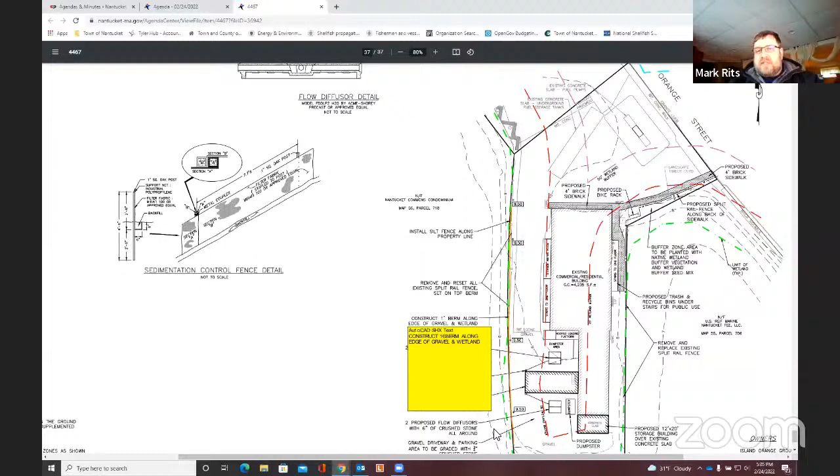Let's start with the easiest. The first thing I'd like to discuss: we're proposing to install a pervious brick walkway that will start at Orange Street, come in along the south, eastern portion of the property, down to the entrance of the store, and will also extend down the east side of the building to allow access to a set of stairs going to the second floor.

Currently, the portion of the walkway going from Orange Street to the intersection, where it goes in front of the building and down the side, is partially paved parking lot and partially trampled, altered dirt. Right along the property boundary there's a split rail fence. We're proposing to maintain the split rail fence and put in a pervious brick walkway.

The portion of the walkway in front of the store is currently concrete pad and/or asphalt. The portion going down along the eastern side of the building is partially asphalt, with the rest being grass and stepping stone paths.

So it'll be a little bit of a change, but it's really designed to contain pedestrian traffic and allow for safe access from Orange Street to the retail store. Currently, people are walking through a portion of the parking lot that has concrete stops and assorted other things. It's really a safety improvement for pedestrian access.

The second item we'd like to do is on the southern end of the building, where there's an existing concrete pad, partially fenced in, used as a storage area for recycled materials. Because of the open nature of that area and high winds, despite best efforts to keep things on site, occasionally stored recyclables get blown around into the wetland and parking area.

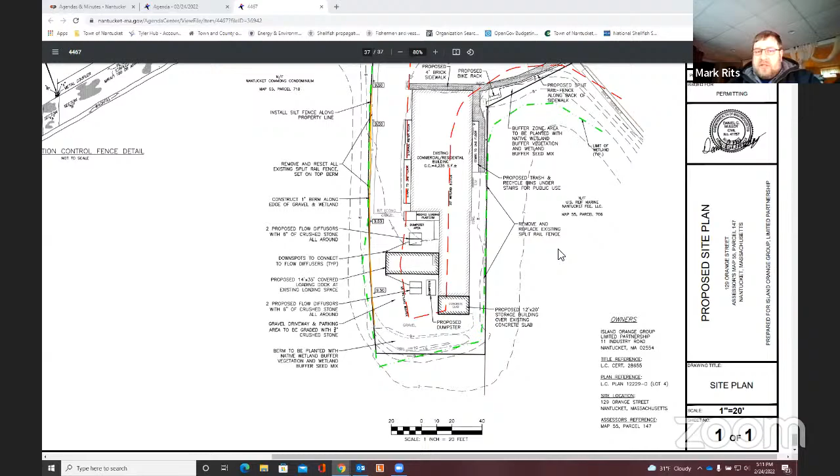With that, I'll be happy to answer questions on any of the components.

Thank you, Mark. Are there any questions or comments from commissioners?

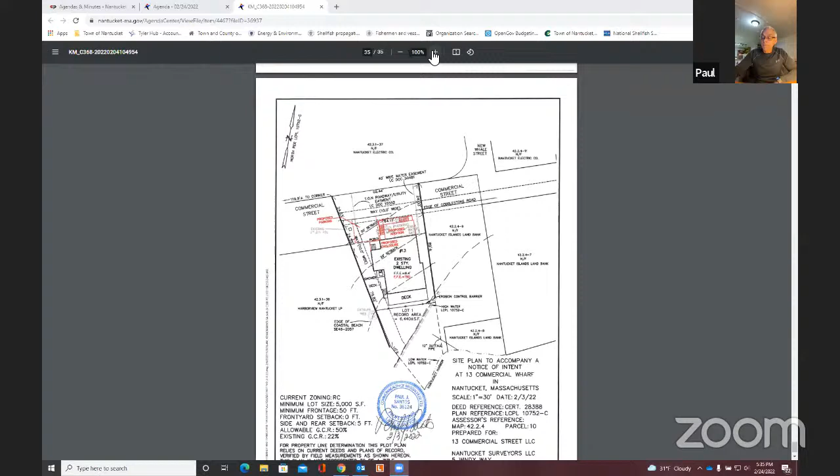This is a residentially zoned property located on the south side of Commercial Wharf. It's adjacent to New Whale Street, and it's across the street from the Nantucket Electric Company property. It is bordered by Commercial Street to the north and the Nantucket Harbor to the south. The property contains a single-family residential structure that has been there for some time.

In 2008, a prior owner sought approval for a renovation and expansion of the existing dwelling, and that's how the dwelling currently sits today. That renovation involved expanding the existing dwelling, replacing or eliminating an old wood bulkhead that existed on the property, and elevating the site to be flood zone compliant with the regulations in effect at that time by placing the property completely on a wood pier foundation. So it's an elevated structure, completely elevated on wood piers.

The site itself abuts Nantucket Harbor. In fact, the property line is the mean high water of the harbor. There is also a coastal beach associated with the harbor that runs underneath a portion of the existing structure. You'll notice the line of the harbor is shown on the plan, then there are 3 dashed lines: the edge of the coastal beach, the 25-foot setback, and the 50-foot setback. The structure itself is located on the coastal beach, within the 25-foot setback, and portions of it are also located within the 50-foot setback.

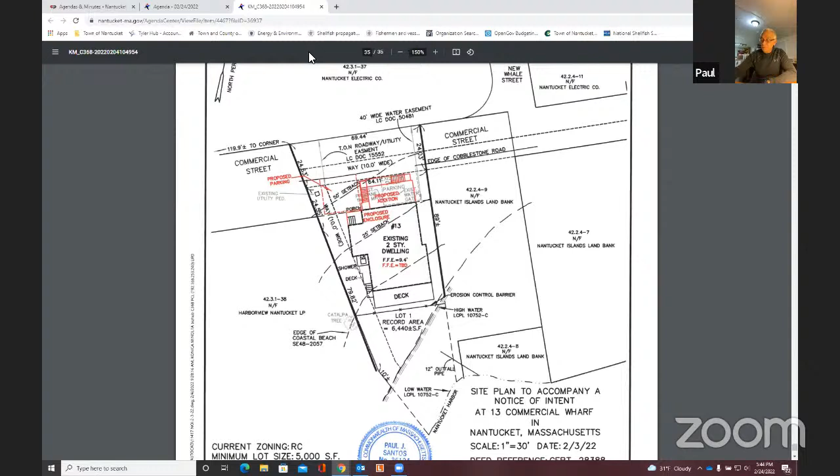She is also the current owner. Property was in the same owner's hands that redeveloped it in 2008 until it changed hands fairly recently to the current owners. Happy to answer any questions that the board may have.

Thank you, Paul. Mark, I see your hand up. Yeah, thank you, Ashley.

I see a very easy solution to a waiver being issued, because there's an opportunity to do a net benefit of raising the house, moving it back, and not doing the addition involved. Adding the addition forces you to stay well within the wetland area or in the high tide zone. So I think adding the addition sort of forces you to stay there, whereas if you were to move the house back, there would be a very obvious net improvement. And that would be my thought. Does that make any sense? The owner won't be happy about that, but that's kind of where I come from.

Thank you, Mark. I have to say, I would have a difficult time approving the addition component on this project, given that it's within the 50. So that's definitely something I find difficult to approve.

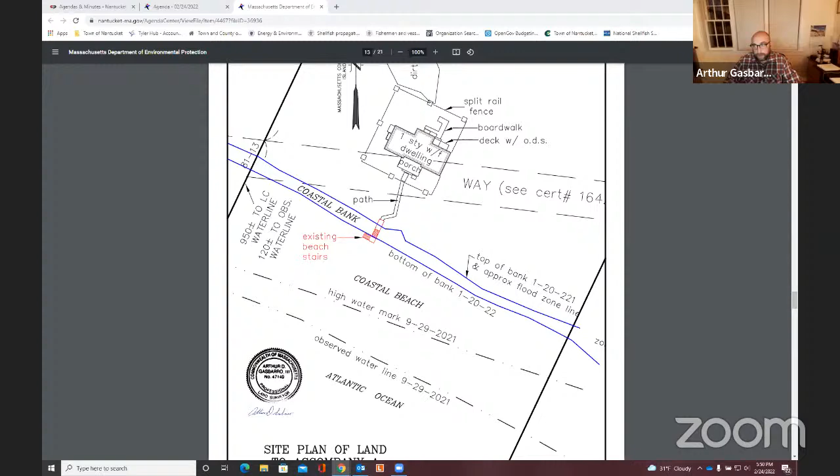The owner now understands that even the replacement of what was there, or if something was lost, would require a permit. We are waiting for a file number, but I'm happy to take any questions or concerns you may have. They're a timber set of stairs, and there are photos in the packet.

Thank you, Art. I know this is one where obviously the owner wasn't aware they needed a permit for, but this would be a great location for aluminum stairs. So if they ever need to be replaced again, I think that should be the next material. I can convey that, yeah. Any questions or comments from commissioners?

Seth? Thank you, Madam Chair. Maybe this could just get set in the order of conditions section, but I strongly feel that any projects that come in for after-the-fact approval should have in the permit findings that the structure was built without the benefit of a permit. I don't see any issues with how it is built, and I'd be willing to write a positive order of conditions for the structure. But I think it needs to go on the deed so that the owner and any future owners are aware that this was done without our permission.

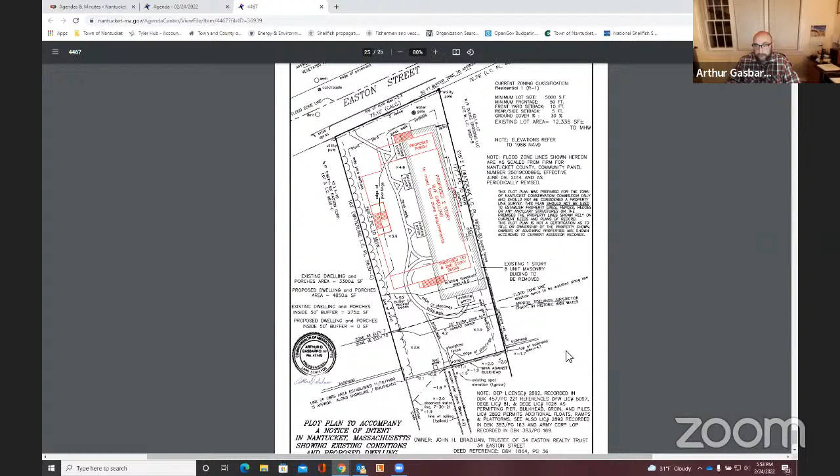I'd be happy to take, and likewise I don't have a file number, but I'd be happy to take questions or concerns at this point that you might have with the application. Thank you, Art. Are there any questions or comments from commissioners?

Looks like no. So we'll open it up to public comment. Does not look like we have public comment at this time.

So commissioners, any thoughts to leave Art with before we continue? Looks like no. So Art, would you like to continue this one until March 10th as well? Yes, please.

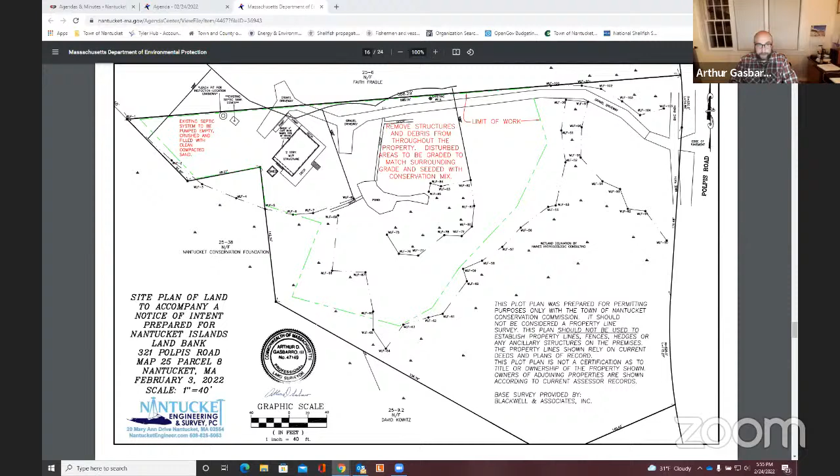Thank you, Madam Chair. I'm before you tonight for an application for the land bank to essentially clean up a property that they purchased. They're proposing to remove all of the structures, and there's some debris throughout the property, some little sheds and shacks, and there's a septic system. Essentially they just want to clean everything up, which you can see on the aerial.

Some of it is located within the resource area. That would be done. There's paths and access ways. The area of the property shown to the north of the green line, which would be our limit of work, has been historically disturbed and used for quite some time. So it's really a cleanup and restoration project with as minimal disturbance as possible.

The house is the main element, which has the main driveway that goes into it. I envision that it would likely be put into roll-off containers and taken away.

Thank you, Art. Are there any questions or comments from commissioners? Looks like no. I'm happy to see this one go to land bank. There had been some cutting I noticed on one of the buffer sides happening in the last few years. So I'm glad to see it's going to get cleaned up.

At this point, if there's no commissioners' questions, we'll open it up to the public. It does not look like we have public comment, and we're also missing a file number on this one. So Art, would you like to continue for 2 weeks? Yes, please. Okay, so this will continue until March 10th.

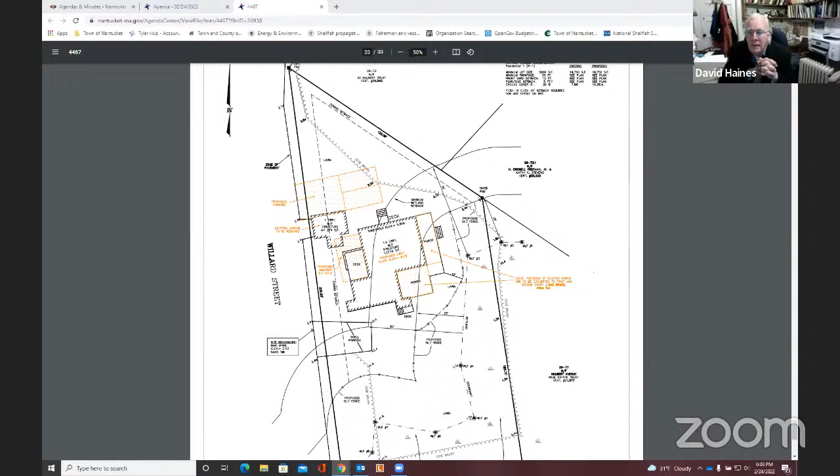So that, in summary, is it in a nutshell. Also, we were removing the existing garage, which would allow us to move that building up into that location a little more and try to increase our setback to the wetlands. With that, if you have any questions or comments, I know it's not an easy one, but it's what was dealt with. Thank you, David. Are there any questions or comments from commissioners?

Seth? Thank you, Madam Chair, and I appreciate the willingness of the representative to consider moving the house farther away from the wetland buffers. Even if we can't get it entirely out of the 50-foot buffer on the site, trying to get outside the 25 would be preferable. Thank you for your comments, Seth. I would agree with you.

Maureen? As would I. Jeff's suggestion was exactly the notes that I had made on this — can't you move it up there? So I think that would be great. Thank you, Maureen. Mark, I see a thumbs up — are you in agreement? Okay.

So, David, it looks like, if possible, we would love to see this proposal with the house moved as far away as possible, in order to reestablish some of those buffer zones. I am very happy to see they're going to try and let the wetland revegetate and restore. That's definitely a positive component.

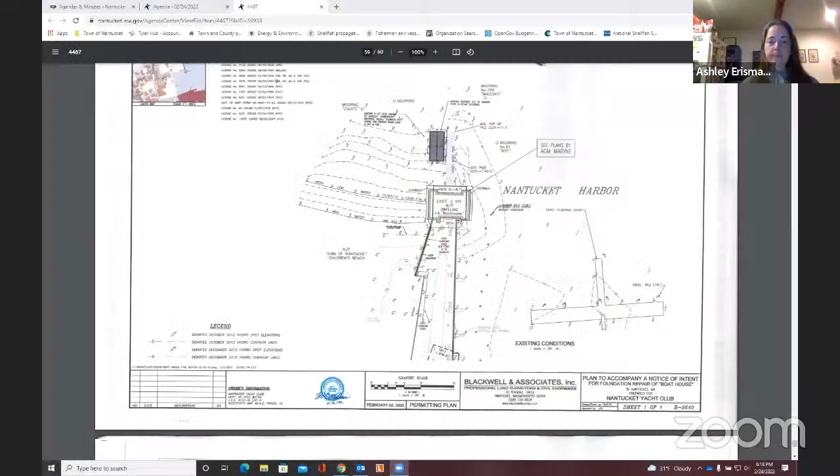Sorry to interrupt, Leo. Go ahead. No problem. And I believe Richard Fitzgerald from AGM is also going to speak on behalf of this application.

What you have before you is an existing structure, an existing license structure, and the license allows and requires the structure and the piles to be maintained in good order. AGM did an inspection last year, at the end of last year, to look at the piles supporting this structure. The photographs in the notice I submitted show that a lot of them are in disrepair. Also, the wave screen that skirts the building had some damage done over a period of years, and they plan on replacing those.

If Richard's online here now, I'd like him to speak about the procedure that he's doing and what he found when they did the inspection.

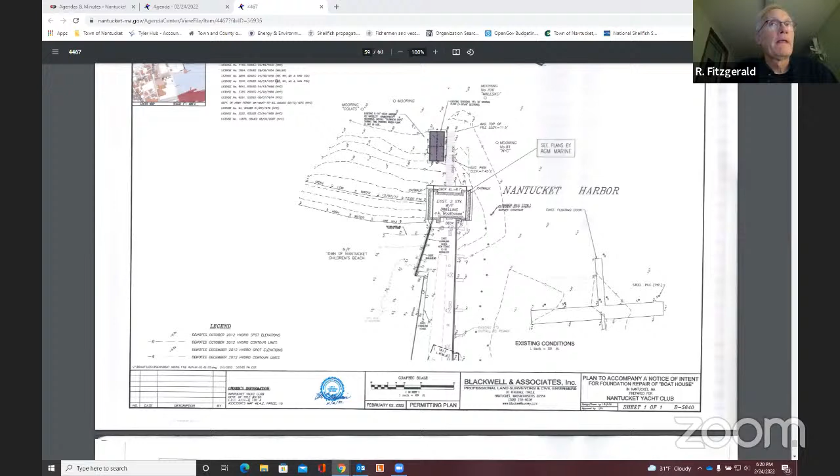Good evening, my name is Richard Fitzgerald, an engineer for AGM Marine Contractors. We inspected the underside of the pier and building structure, supported by a number of timber piles as seen in the drawing. If you have that other drawing up... there, thank you. And then around the perimeter, there's a wave fence to help keep wave action down from inside.

Damage that we noted consisted of marine borer activity, which basically eats timber piles—they live in salt water. You can also see on some of the piles there's a concrete jacket that was a previous repair; in some of those, the concrete has spalled. Other damage is bolts that have corroded over time, and some upper structure damage where timber pile caps and stringers were damaged.

What we're proposing to do is basically repair and replace in kind. There'll be no increase in footprint except for 3 piles at number 19, where we're proposing to put a concrete jacket around those piles—they've had significant marine borer damage. Other piles will just have sections cut out that are damaged from marine borer or rot, and replaced with new timber sections. The drawing lists the damage that we noted, and also shows the repairs that we're proposing.

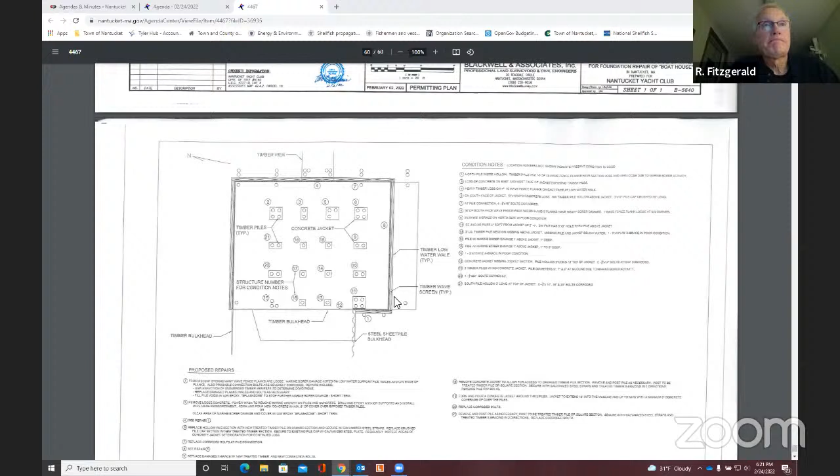Are there any questions or comments from commissioners? Looks like no. So we'll open it up to public comment. It does not look like we have public comment on YouTube at the moment.

So if there are no comments or questions from commissioners, Jeff, do we have everything we would need to close this one? Yes, we do. Okay, Leo, would you guys like to close? Certainly would. Is there a motion to close? Motion made by Linda. Is there a second?

Seconded by Maureen. So by roll vote: Beal? On second thought, I will abstain. Okay.

Engelborg, aye. Erisman, aye. Phillips, aye. Williams, aye. That carries, with Commissioner Beal abstaining.

Thank you. Thank you. And that moves us on to 88 Pocomo LLC at 88 Pocomo Road, represented by Mark Rits.

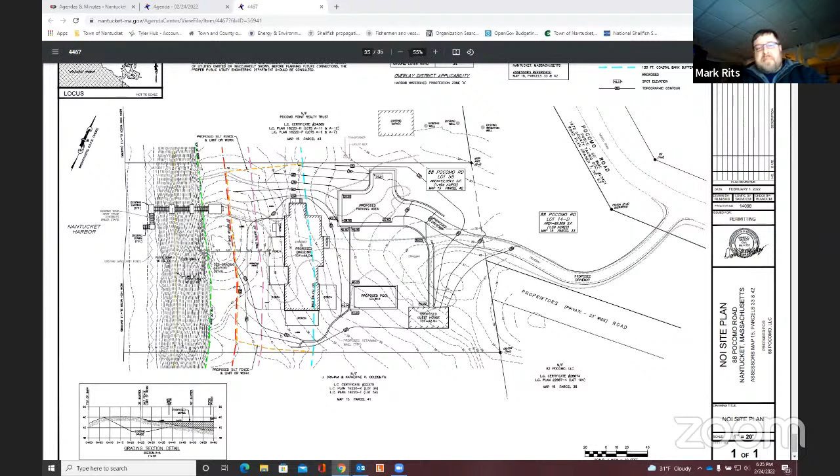That's pretty much it. Thank you, Mark. I was curious -- it could have been in the packet information but I couldn't find it -- what's the erosion rate here?

The erosion rate, I believe I had that. It is well under a foot a year. Let me just look quickly if I called it out. I thought I had it. I can't seem to find it as I'm scanning through quickly. It's a very slow erosion rate -- under a foot a year, so we're well below the threshold in the regs in terms of distance.

We understand, obviously, that we wouldn't be entitled to any future protection of the structure. But on this particular part of Pocomo, we were looking at something just under a foot a year for the CZM shoreline rate. Thank you, Mark.

Jeff? So I actually have it in my notes here -- it's the CZM rate for the lot, 66 hundredths of a foot per year.

Okay, and just as a reminder to everybody too, our local regulations -- this is a new structure on a coastal bank -- actually require a condition in the order of conditions that prohibits the use of a coastal engineering structure going forward for protection of the house.

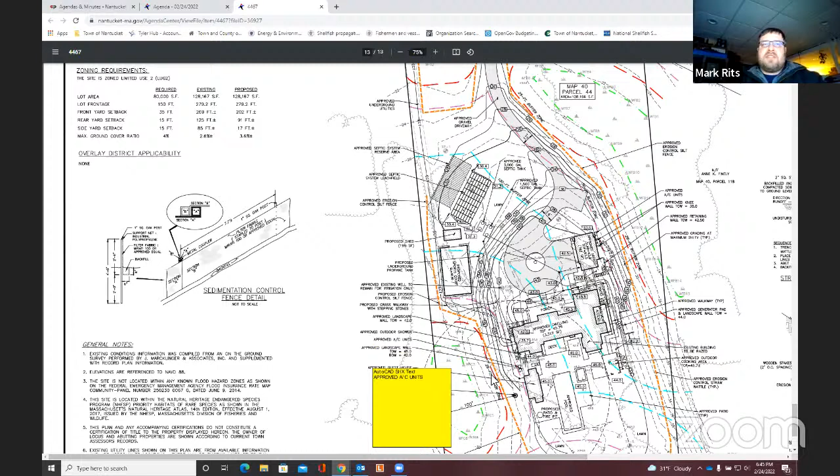And then the final change to the plan is a fire pit on the patio. It's not actually a new proposed fire pit - the fire pit was previously approved on the other side of the pool. We're just flipping it to the west side of the pool from the east side. So we just wanted to get that change on the plan as well. And that is the extent of the modifications on this plan. Thank you, Mark.

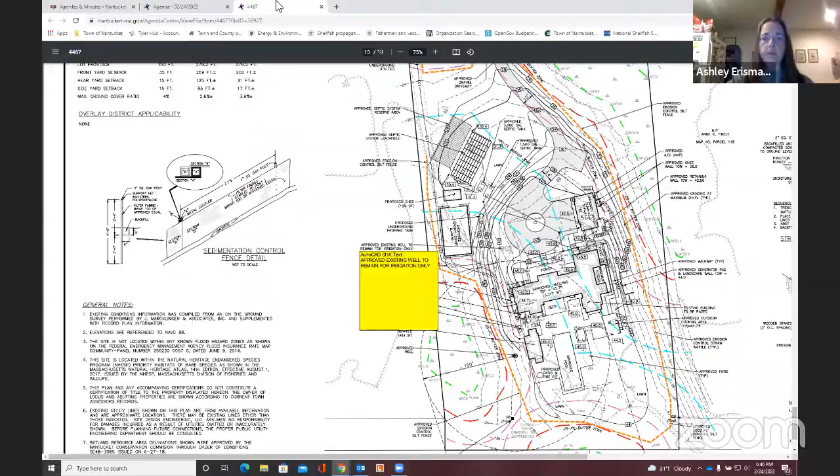Are there any questions or comments from commissioners? Looks like no. So we'll give a quick check and see if the public has any questions or comments. Also looks like not on YouTube. So Jeff, do we have everything we would need to issue the amended order?

Yes, you do. Okay, is there a motion to issue the amended order? Motion made by Linda. Is there a second? Seconded by Maureen. So by roll vote: Beal, Aye. Engelborg, Aye. Erisman, aye. Phillips, Aye. Williams, Aye. That carries unanimously. Thank you. And that moves us on.

We don't have any RDAs tonight, so that moves us on to minor modifications. We have Ang at 11 Jonathan Way, represented by Jeff Blackwell. Thank you, Madam Chair. Jeff Blackwell for the applicant. I think we're down to the final housekeeping details on this project, which I'm sure you all recall very well.

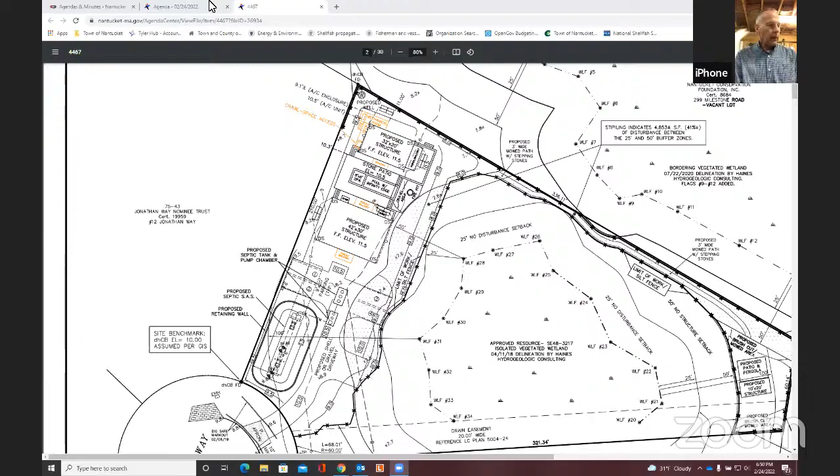So we hope we were in last time to deal with all the lighting matters with Ben Shampoo, and I'm hoping that we have dotted all the I's and crossed all the T's on this project, and that the next time we come in will be for a certificate of compliance.

Thank you, Jeff. Are there any questions or comments from commissioners? Looks like no.

This project has come from a place where I thought it was never going to get permitted. We've certainly made it a long way. I was betting the same myself.

Jeff Carlson, do we have everything we would need to issue the minor mod? Yes, and I will do a count to see if this is the most modified or amended project that we've had at some point. So it's getting close.

Is there a motion to issue the minor mod? Motion made by Linda, seconded by Seth.

So by roll vote, Beal, aye. Engelborg, aye. Harrisman, aye. Phillips, aye. Williams, aye. That carries unanimously.

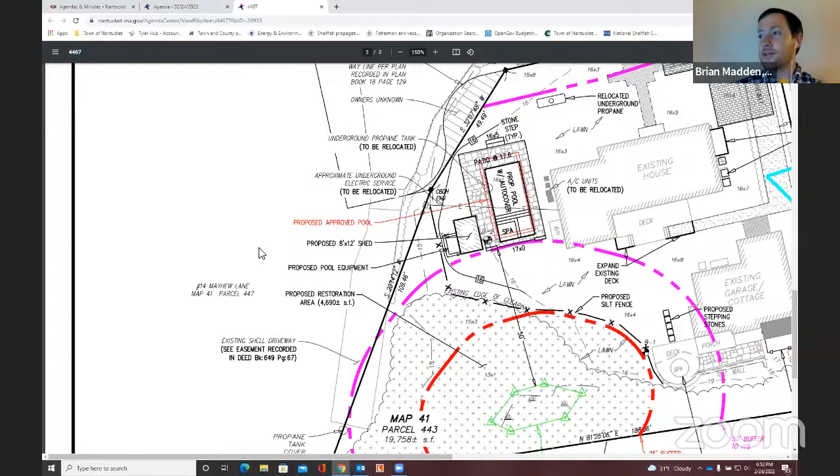If you remember, this pool was designed to maintain that 2-foot separation. And then the last bit of minor update is the proposed restoration area of the buffer zone was slightly expanded on the west side. Originally, it was encompassing the IVW and the 25-foot buffer zone, and it's proposed to be expanded out to the west. So it's fully revegetating all vegetation within that area to remove the invasives and replace with natives.

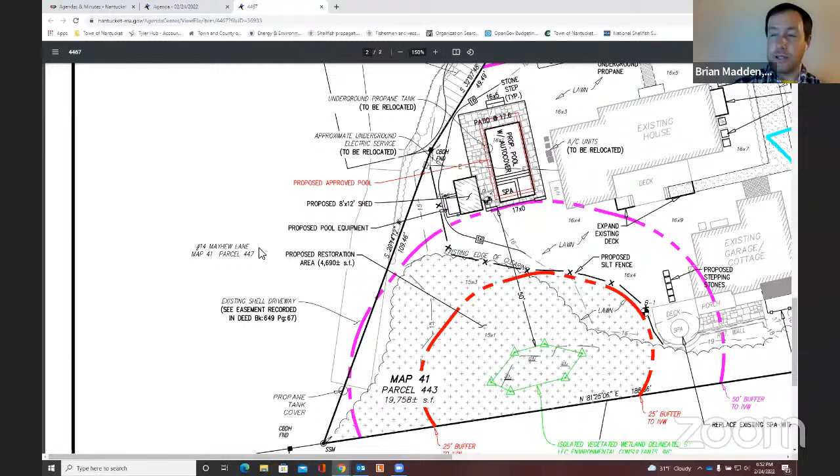Thank you. That's about it. Thanks. Are there any questions or comments from commissioners?

Looks like no. Jeff, do we have everything we would need to issue the minor mod? Yes, this is another project contending for most modifications now too. This is only the second.

All right, is there a motion to issue the minor mod? So moved, motion made by Linda. Is there a second?

Seconded by Seth. So by roll vote, Beal, aye. Engelborg, aye. Harrisman, aye. Phillips, aye. Williams, aye. That carries unanimously.

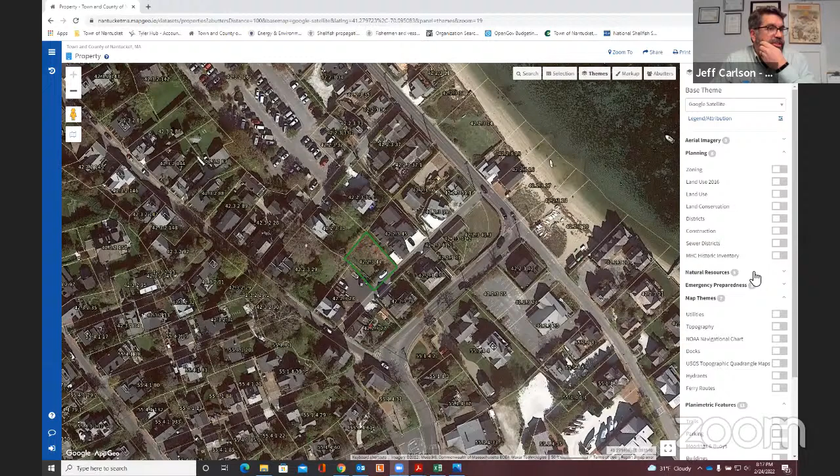So be that as it may, I'll flip it on so everyone can see it. And hazard mitigation, you can see pretty clearly, even with the square that didn't render, that it's within the 100-year floodplain within the AE zone. So it's clearly within land subject to coastal storm flowage.

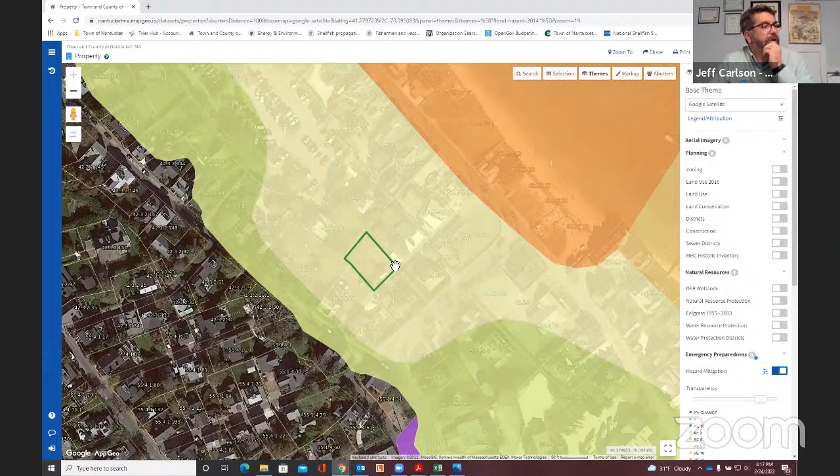So it's a site that would require permitting to do work. I happened down Meader Street, and that's what I saw. So the lot's been completely stripped of vegetation. Someone clearly tried to excavate an area. You can see groundwater that was standing within the hole that was left behind.

Just for frame of reference, Washington Street would be where my mouse pointer is on that side of the lot, and this would be the more landward side over on this side. So I'm standing on Meader Street properly.

So I feel pretty convinced that there's been some pretty significant disruption to a potential vegetated wetland, clearly some work to land subject to coastal storm flowage. There's this little, I hesitate to call it a retaining wall, but landscape timbers that have been installed around some of the perimeter of the lot. To me, it looks pretty clear that they're going to try to put some fill where we're going to.

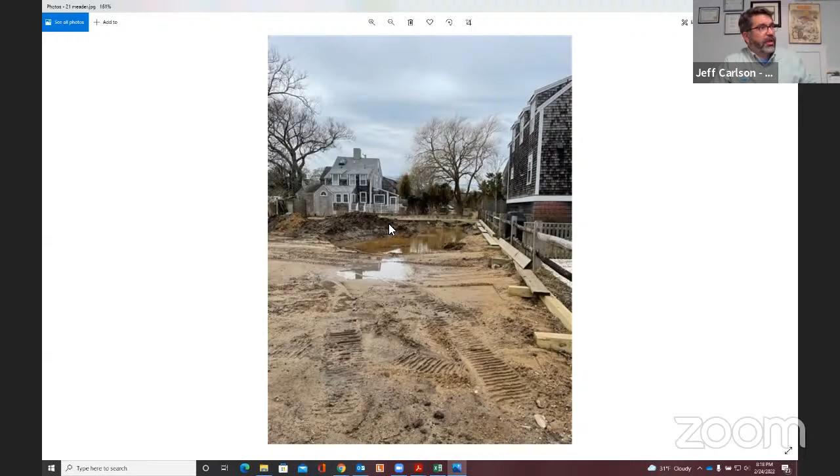I managed to reach out to the agent listed as the agent for the LLC and explain the situation to them, and that work had to stop, and also spoke to someone who had done some work previously for them, if they had a good contact, that work needed to cease there. We followed up with another inspection today and told some folks that were there that work had to stop on the site. But we are looking to issue an enforcement action to cease and desist at this point, and kind of order a plan for restoration of that disturbed area and the land subject to coastal storm flowage back to its original grade, just to get started.

Hopefully that made sense to everybody.

It did. I'm glad that you needed to take that little detour because of Harbor Fuel. So that's a pretty massive shift on that property.

Yeah, would somebody like to make the motion? I'll make that motion. Seth got you, and then Maureen got you with the second. So by roll vote: Beal, aye. Engelborg, aye. Harrisman, aye. Phillips, aye. Williams, aye. That carries unanimously.